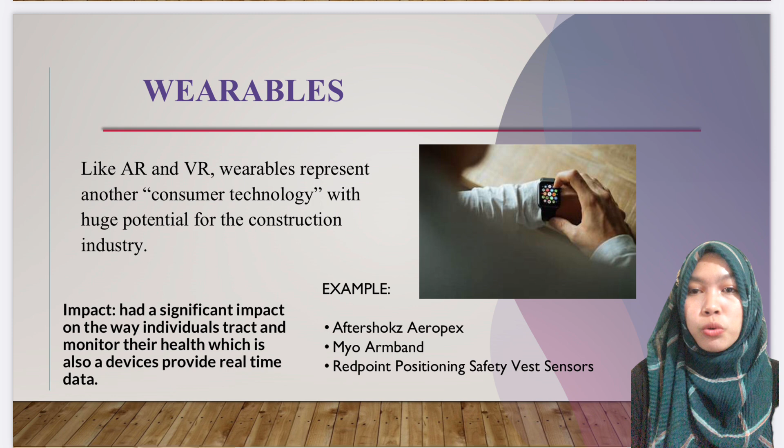This impact has had a significant effect on the way individuals track and monitor their health, as these devices provide real-time data.

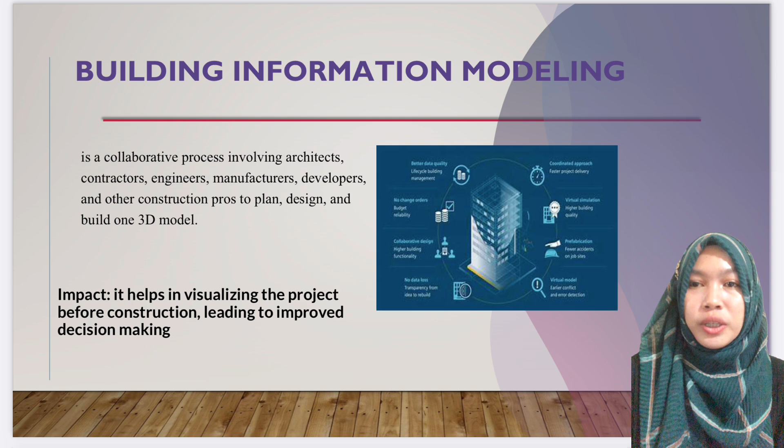Number 4, Building Information Modeling, or BIM, which is a collaborative process involving architects, contractors, engineers, manufacturers, developers, and other construction professionals to plan, design, and build one 3D model. BIM isn't new, but BIM software is becoming much more sophisticated and data-driven. As for its impact, it has also helped in visualizing the project before construction, leading to improved decision making.

Number 5, drones. Drones are one of the biggest emerging trends in the construction technology space. While they've been in use for several years at this point, they are shifting into a more prominent role.

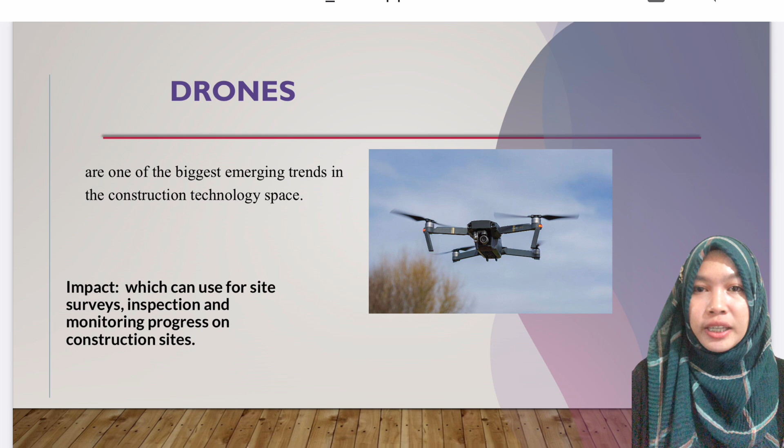The impact of this technology can be used for site surveys, inspection, and monitoring progress on construction sites.

Next, we have 3D printing. According to an article, 3D printing will likely be used by NGOs, private construction companies, and governments in the coming years to support a wide range of projects, and for good reason: the technology promises faster, greener, and more affordable homes. 3D printing also represents an opportunity to provide cost-effective housing to impoverished communities around the world. It's a potential solution for the housing crisis happening across the US, and for more creative-minded designers, 3D printing enables them to design construction in any form without taking on the risks that come with experimentation.

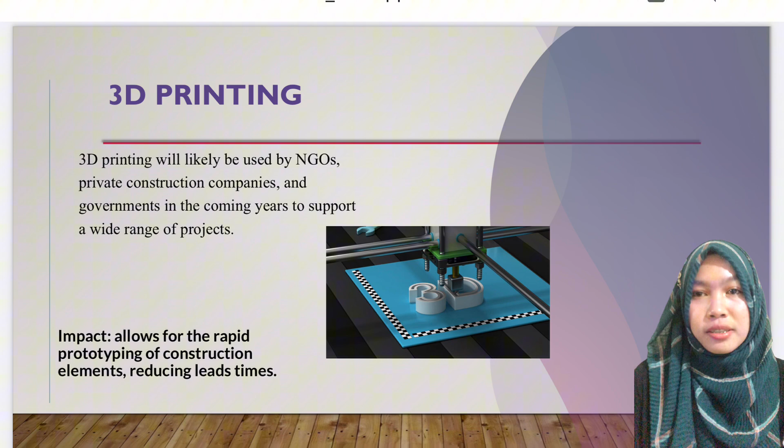Robotics. Robots have yet to take over the construction industry, but they'll likely see an uptick in adoption, especially as similar technologies like drones become ubiquitous. In fact, IDC predicts that demand for construction robots will increase by 25% annually between 2020 and 2023. Robots are able to perform a wide range of tasks on the job site, from bricklaying and painting to installing drywall. This technology stands to create safer working conditions for construction workers, and it can also be used to pick up the slack during labor shortages.

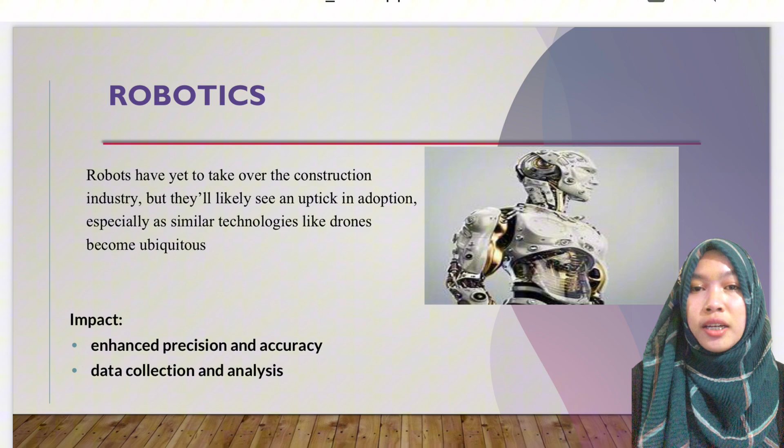The impact here includes enhanced precision and accuracy, and data collection and analysis. Number 8, we have advanced building materials.

Another exciting area of innovation in the construction technology space is advanced building materials, designed to mitigate some of the biggest climate and infrastructure challenges of our day. The impact includes sustainability, durability and resilience, and energy efficiency.

A few examples: there's self-healing concrete, a material that uses dormant living spores to help cement repair itself when cracks occur. The idea is to prevent long-term damage caused when water, chemicals, and other elements seep into tiny cracks.

Also, air cleaning bricks work to improve indoor air quality by using bricks on the exterior to filter impurities in the air. Essentially, an air cleaning brick, or breathe brick, is a modified conventional brick with hollow centers that allow air to pass through into an internal filtration unit that removes heavy elements in the air, then releases the clean air into the building.

There's also absorbent, or thirsty, concrete, which works to reduce runoff from melting snow and rainwater. Here the water percolates into a base layer that sits beneath the concrete, allowing for more control over the flow of water as it moves away from the site.

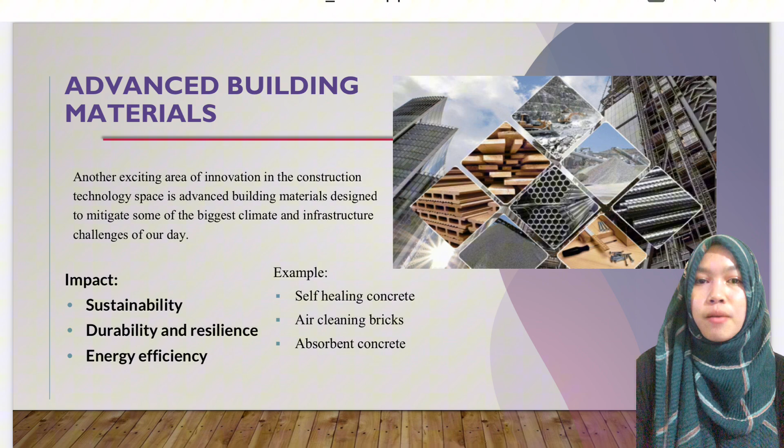Number 9, offsite construction. This takes some or all of the construction process away from the job site, allowing construction companies to tackle new builds from the production line, much like an auto manufacturing plant. Workers have access to the materials and tools they need to perform various tasks, allowing them to complete their work efficiently in a controlled environment.

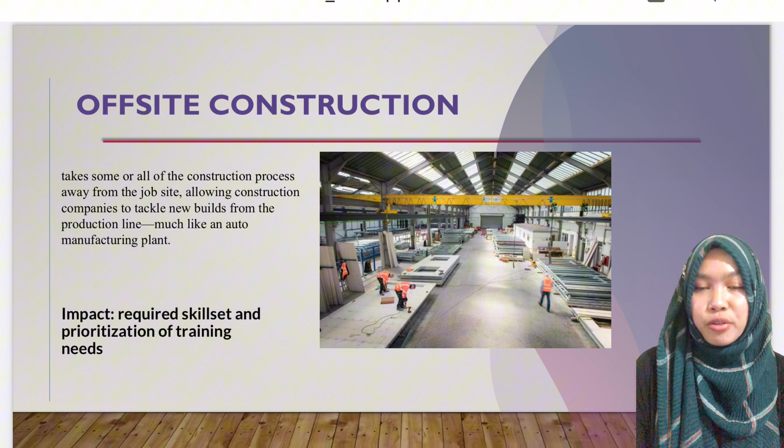There are two main types of offsite construction. First, prefabricated construction. Prefabrication isn't exactly new, but new technologies have made it more accessible for smaller companies and offer better results. Here, building components are built offsite, then transported and installed at the construction site. Prefabricated building components include anything from flooring and ductwork to framing, wall panels, and window assemblies.

The second is modular construction. According to some estimates, the modular construction market could hit the $157 billion mark as soon as 2023. Modular construction is a process where a structure is built off-site in a factory setting before being transported to the job site and installed. The impact of this requires a specific skill set and prioritization of training needs.

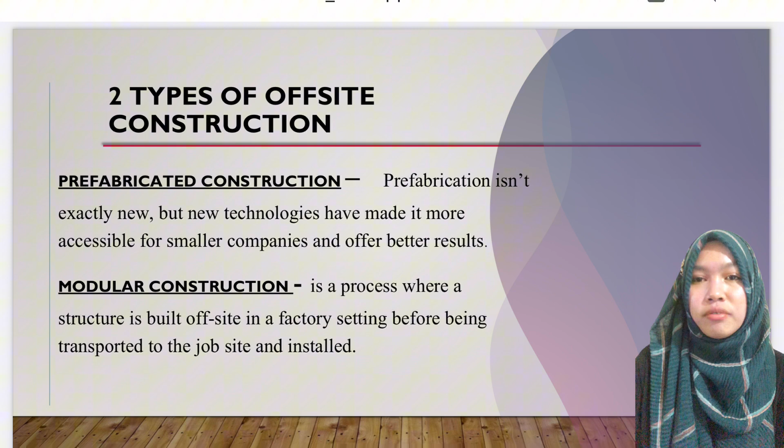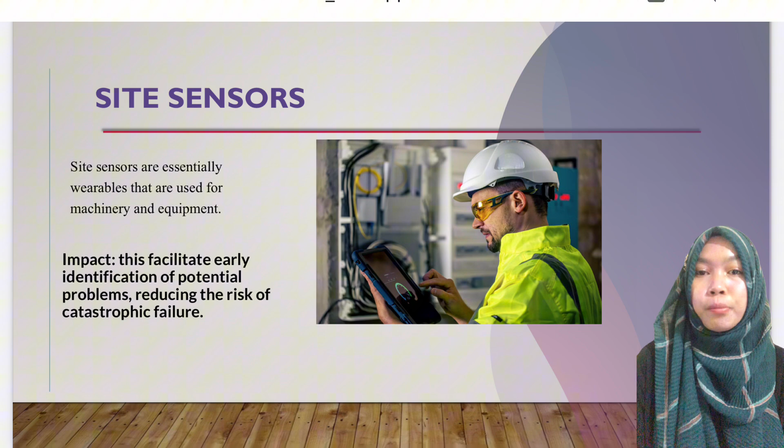Number 10, site sensors. Site sensors are essentially wearables that are used for machinery and equipment. They capture huge, high-density data flows with the potential to transform the entire construction industry. Smart sensors communicate data remotely and typically sync back to a central ERP system. The impact: this facilitates early identification of potential problems, reducing the risk of catastrophic failure.

Key use cases include machine control. In this context, machine control describes the process of using sensors to operate heavy equipment, similar to self-driving cars. This allows construction companies to coordinate precise building tasks, which reduces bottlenecks and delays and boosts productivity.

Site monitoring: radio frequency sensors can be installed throughout the job site to track things like VOCs, temperature, dust particles, and noise levels to limit worker exposure. These sensors connect to a centralized system that captures data and can send real-time alerts to workers when they are at risk.

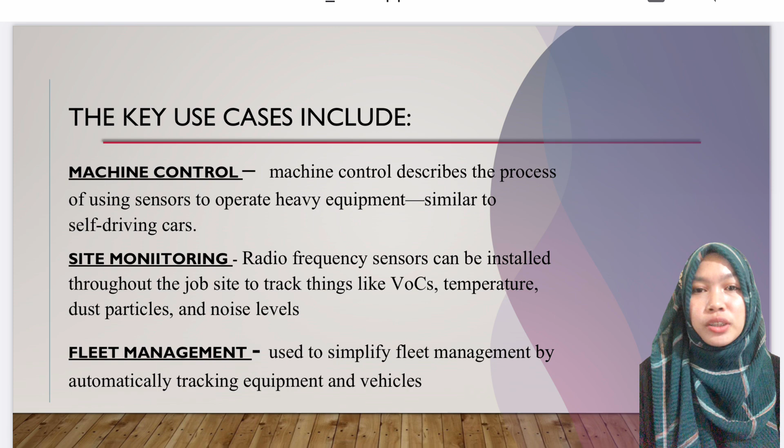Fleet management: sensors can be used to simplify fleet management by automatically tracking equipment and vehicles. Sensors can be programmed to automatically send specific data to a central database, such as fuel consumption, maintenance requirements, location, and more. And finally, autonomous heavy equipment.

Autonomous equipment stands to improve safety conditions and drive efficiency and cost savings for construction firms. Major construction companies like Caterpillar, Hitachi, and Volvo are ramping up investment in autonomous haul trucks, while newcomers like Built Robotics and Safe AI are developing technologies that can convert existing machinery into autonomous equipment. According to the Association of Equipment Manufacturers, or AEM, the use of autonomous equipment for mining, drilling, and self-driving trucks is on the rise.

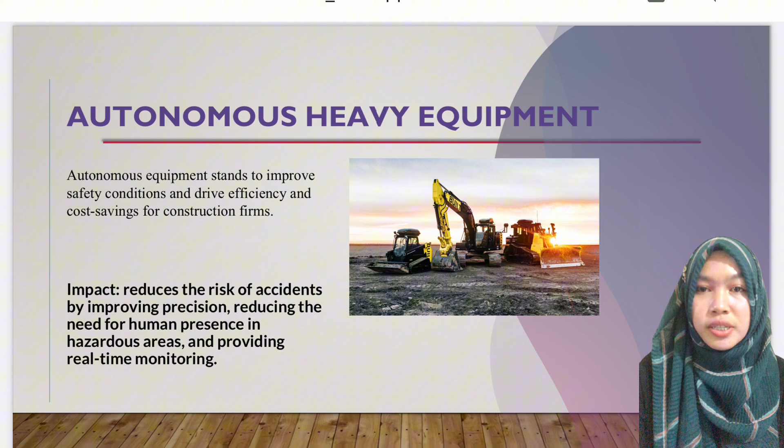In some instances, companies are outsourcing repetitive tasks like welding, bricklaying, and demolition to autonomous equipment. As the impact, it reduces the risk of accidents by improving precision, reducing the need for human presence in hazardous areas, and providing real-time monitoring.

Number 12, we have blockchain. Blockchain technology isn't just for crypto, it's now being used to ensure data integrity and transparency across a wide range of industries, including construction. For the uninitiated, blockchain tracks transactions across a peer-to-peer network and serves as a distributed ledger that records and verifies various transactions and agreements, think contracts and payments.

According to construction solutions firm ION, up to 95% of information about a project is lost as it changes hands throughout the life cycle. So blockchain can store complete records about every asset on the job site. Blockchain can also add a layer of accountability to construction projects, ensuring contractors complete jobs to specification and legal regulatory requirements. The impact gives increasing traceability and makes it difficult to falsify information.

Number 13, we have connected construction sites. These challenges are exacerbated by the massive volumes of data and resources that make up the industry. For stakeholders to work efficiently on a project, they need a solid foundation, a single source of truth. This foundation can be built and maintained with connected construction. In construction, firms like companies in every industry are bogged down with data, manual processes, and information silos. The impact is enhancing project visibility and predictability, providing real-time access to all data.

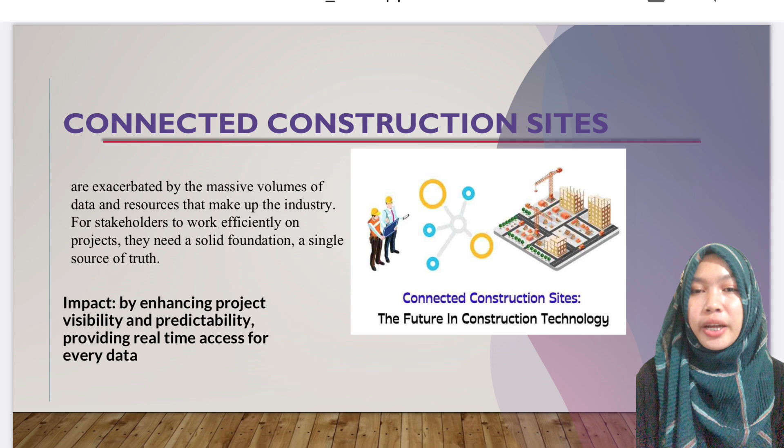Exoskeletons are traditionally associated with physical therapy and rehabilitation programs, but they are gaining traction among construction pros who see the technology as a tool for reducing work site injuries and improving worker efficiency. As the impact, it leads to higher productivity rates and faster project completion.

Construction monitoring technology represents a class of IoT solutions that offer end-to-end visibility into all project people and assets. This tool allows organizations to capture real-time data from the job sites, the office, and other external channels, enabling people to check the status of a project from any location.

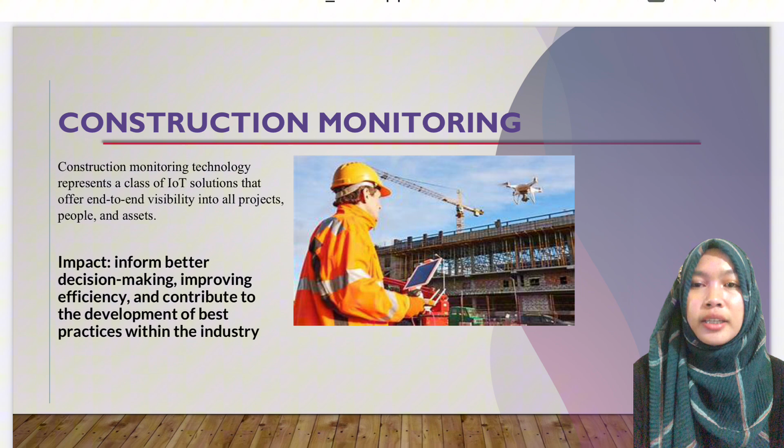Keep in mind, construction monitoring extends beyond installing sensors and surveillance cameras. It's about building a connected ecosystem that helps everyone from architects and engineers to project managers, site managers, and clients understand exactly where a project stands. Construction monitoring supports the following goals.

Reporting: users can generate reports that allow them to dig into work completed, site inspections, asset usage, and so on. Predictive maintenance: connected sensors allow users to track asset performance and keep a detailed record of past repairs or maintenance, allowing them to proactively schedule maintenance or upgrades.

Worker productivity: sensors, cameras, and other tools can track worker productivity, enabling more accountability, more accurate decision making, and better cost estimation. Job site safety: sensors attached to worker hats, vests, and boots monitor for dangerous habits and allow action to be taken before someone gets hurt.

For green building, given the urgency of the current climate crisis, eco-friendly building materials are revolutionizing the construction industry. Green building is a type of construction that focuses on using natural and renewable materials that offer benefits like thermal efficiency and protection from extreme weather events.

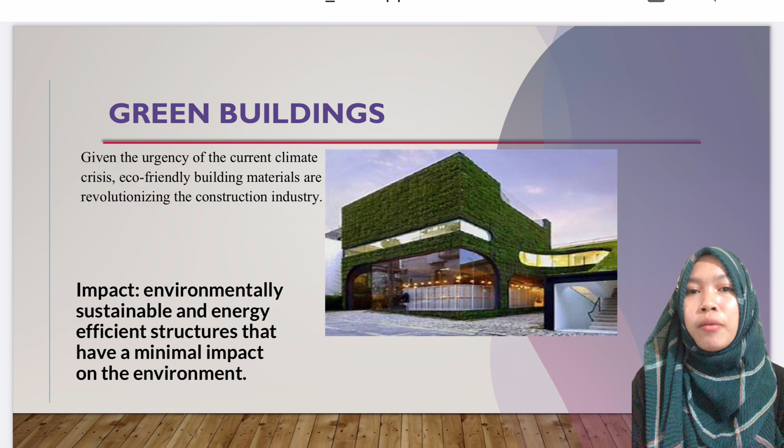Which include cool roofs, which reflect sunlight away from the building and absorb less heat than traditional roofs. Construction teams can apply cool roof coating with ultra-reflective pigment for protection from chemical and UV damage. There's also green roofs, which use plant cover to reduce indoor heat.

Also, geothermal heating is a renewable energy source that uses the Earth's natural energy to generate power. Pipes are placed a few feet underground and filled with an anti-freeze solution that collects thermal energy. Solar power is gaining traction, with builders still looking towards solar panels as a means of capturing energy from the sun.

Other examples include familiar materials like stone, adobe, and bamboo, as well as mycelium, which is mushroom roots, recycled tires, and scraps from shipping containers. The impact is environmentally sustainable and energy efficient structures that have minimal impact on the environment.

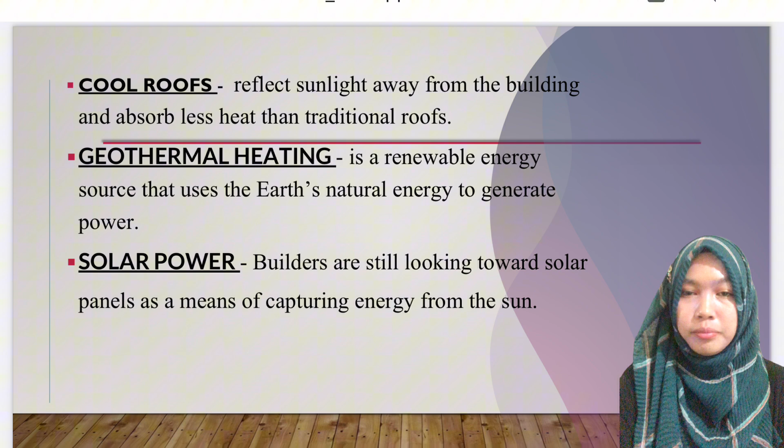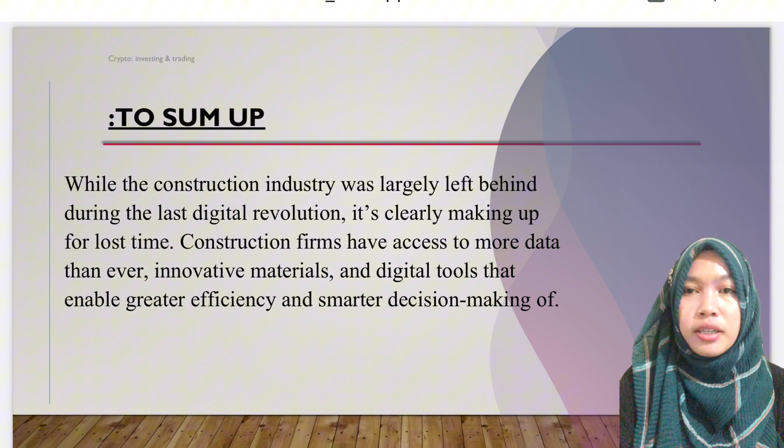To sum up, while the construction industry was largely left behind during the last digital revolution, it's clearly making up for lost time. Construction firms have access to more data than ever, innovative materials, and digital tools that enable greater efficiency and smarter decision making. So that's all.